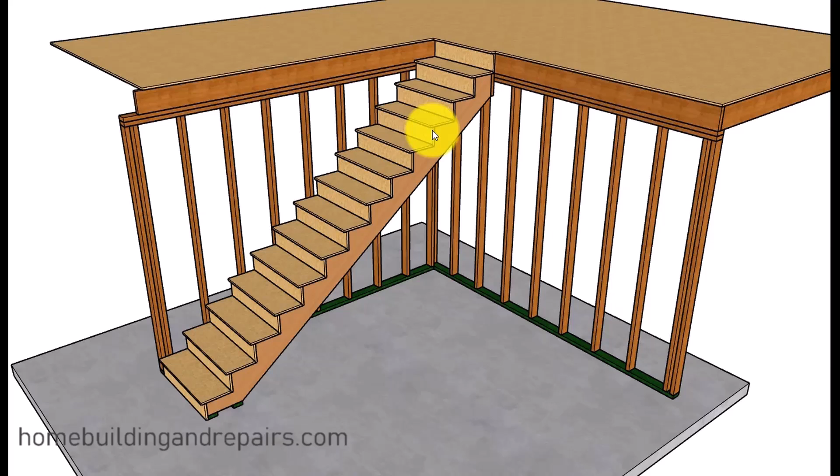In this video, I will show you how to create an arch shape underneath a set of straight stairs.

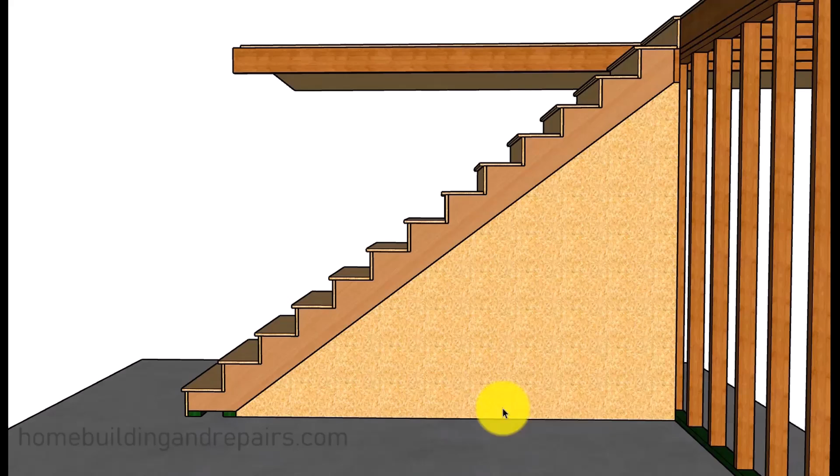First, I'm going to remove the wall so it's not in our way with our visual scenery. Now I'm just drawing this here. Obviously we don't have a large sheet of plywood like this, but I'm just drawing this to give you an idea of what we're going to be doing, to draw something on the floor. So this is just going to be a template.

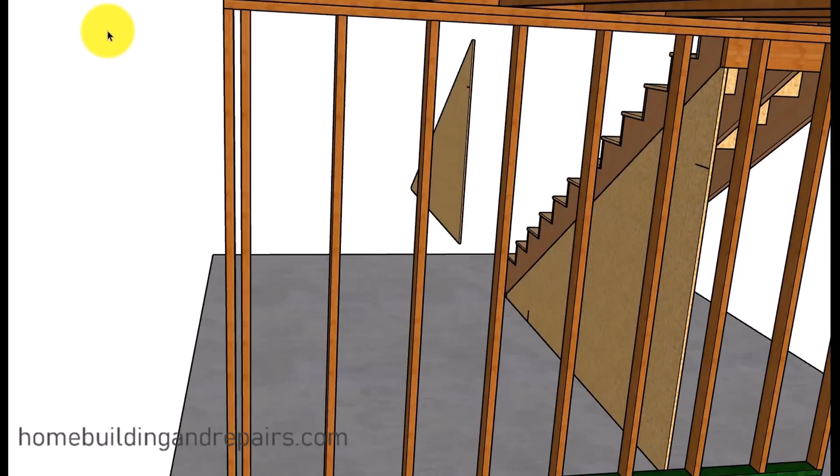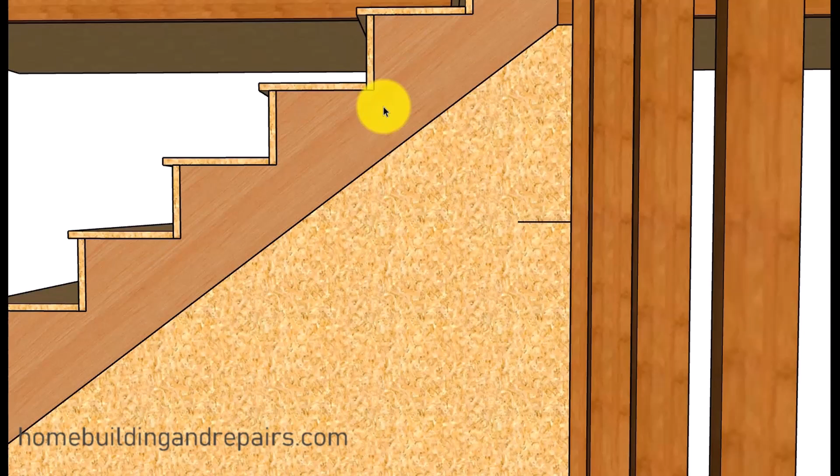Now let's put the lines we're going to use for our arch, and you can place these anywhere. I'm just going to start here and here and draw an arch in here, and then I'm actually going to lower it to give you an idea of what that would look like also. Coming in a little bit at the top, and you can see here you'll have to allow for this with your template if you have any imperfections, if it's not going to form a straight triangle.

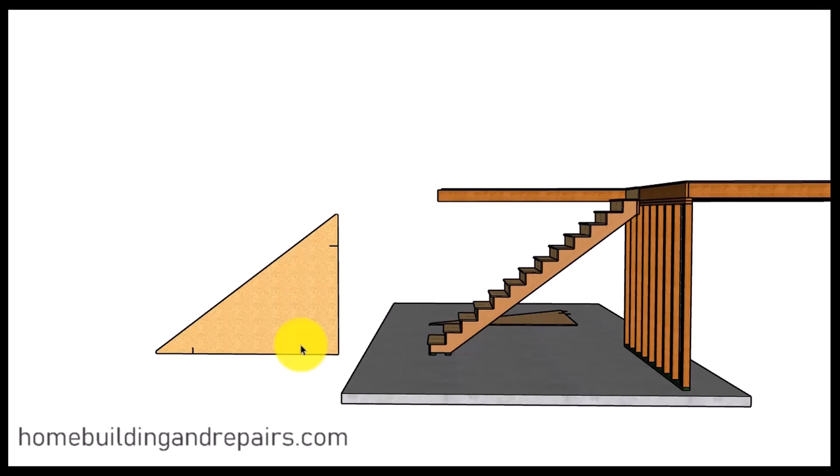Now let's move our template over here, and again I'm just walking you through what I think would be the easiest explanation of what I'm actually doing. I'm going to lay this piece down over here.

And of course here are some of our marks, like these are the measurements for the arc here. I kind of wanted to give you an idea here.

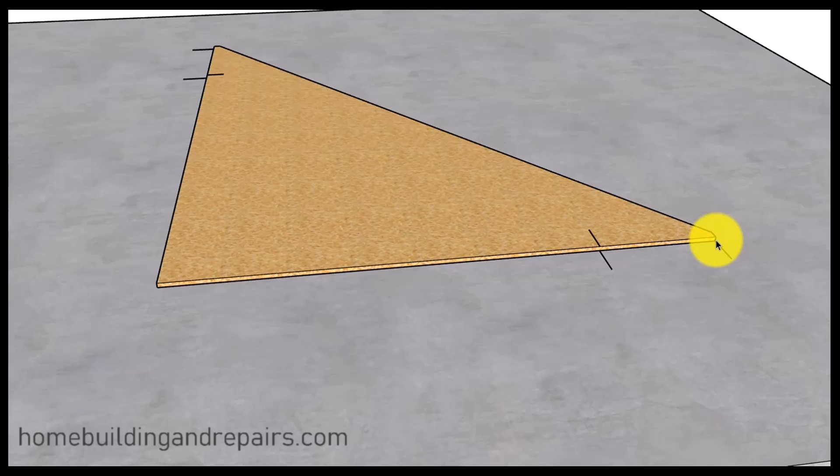Since I don't have a piece of plywood this big, I'm going to lay out some lines here that are square, and we're going to use some individual pieces of plywood to create our template. But again, I'm just walking you through what I think will be the easiest way here.

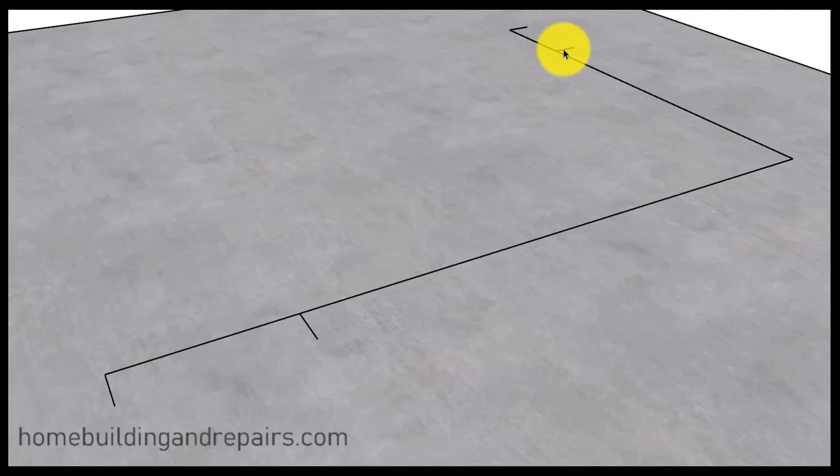So here are our lines, and then the end here, which remember we're going to go up 1.5 inches and 1.5 inches here. So we've got a couple of straight lines.

You can snap these lines out or draw these lines on a flat surface, or you can get a couple of pieces of plywood and screw them together to create a flat surface, whatever you need to create a surface. But this is just what I'm using in this tutorial as an example of how it can be done.

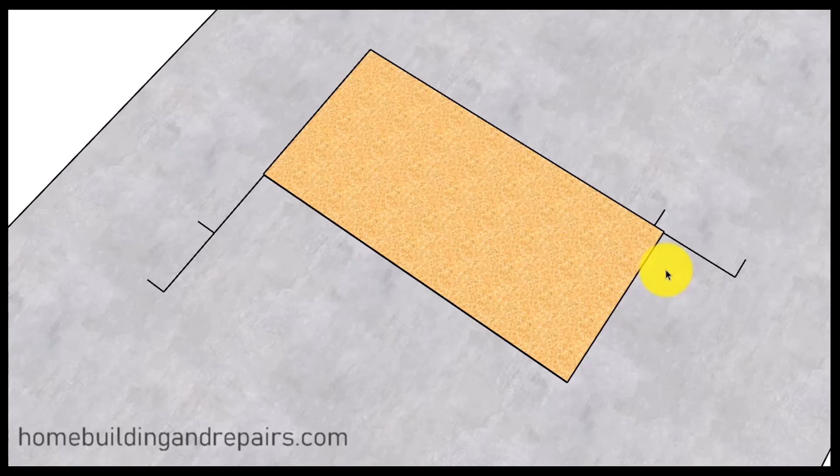Now we can go ahead and throw a piece of plywood in here. This is a 4-foot by 8-foot piece of plywood, and I wanted to show you how I'm lining it up with the lines here. Put the plywood in, give you an idea what we're doing.

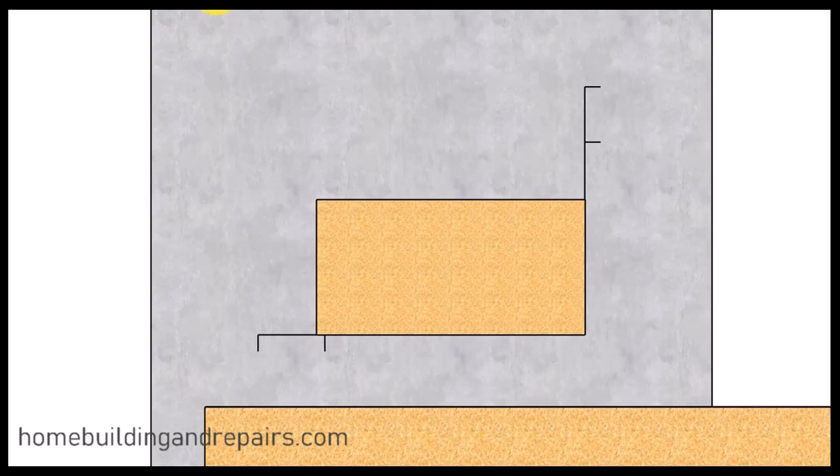And of course we need another piece down here and a piece down here for our template, so let's throw those in. Now we can draw our lines.

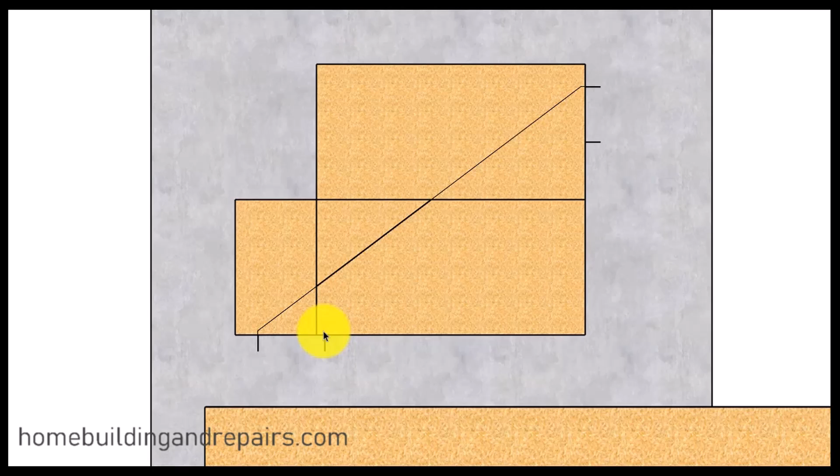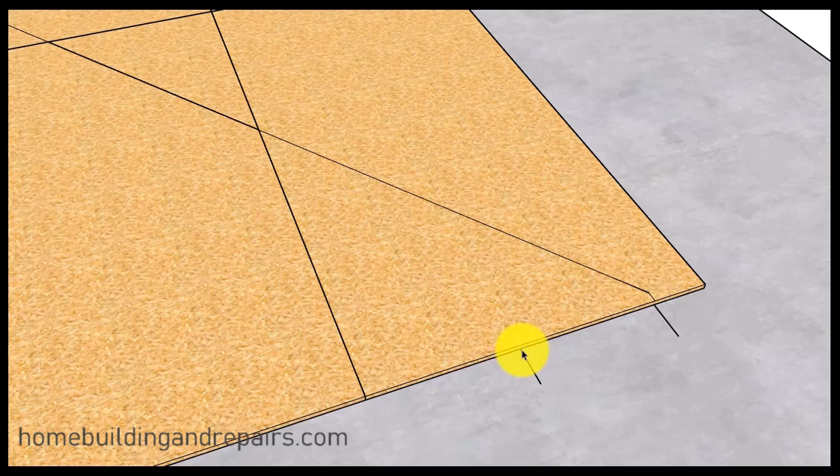Just want to zoom in, give you an idea. We're coming up 1.5 inches. Same thing over here, and remember these are the lines we're going to use for our arc.

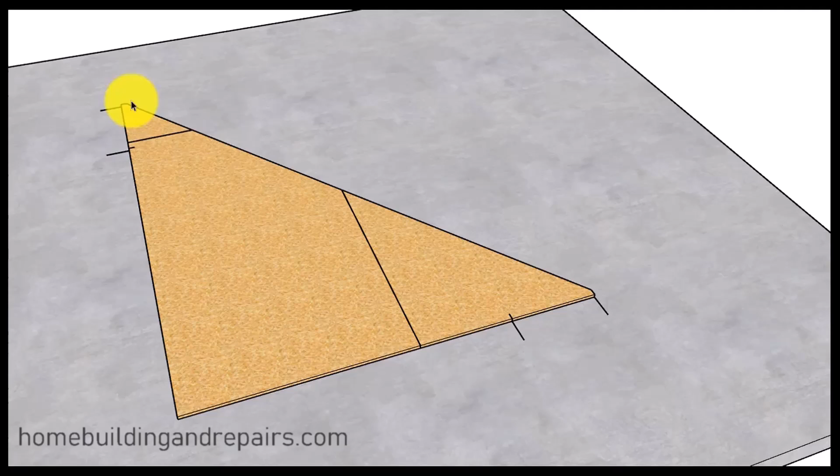Next up, let's go ahead and make a couple of marks here where our arc is going to go. I'm not going to go into detail and show you how to draw a curved arc or curved shape - I have plenty of videos on that already. I'll put a link here to the video, and maybe I'll put a link in the description box to the website where I have plenty of information on how to draw a curved line for something like this.

And if I don't have it on there for some reason and you can't find it, let me know in the comment box, or send me an email, and I will draw something and attach it to the video. I don't want to have 500 videos on the same thing as my main topic - I try not to even have too many more on the same topic.

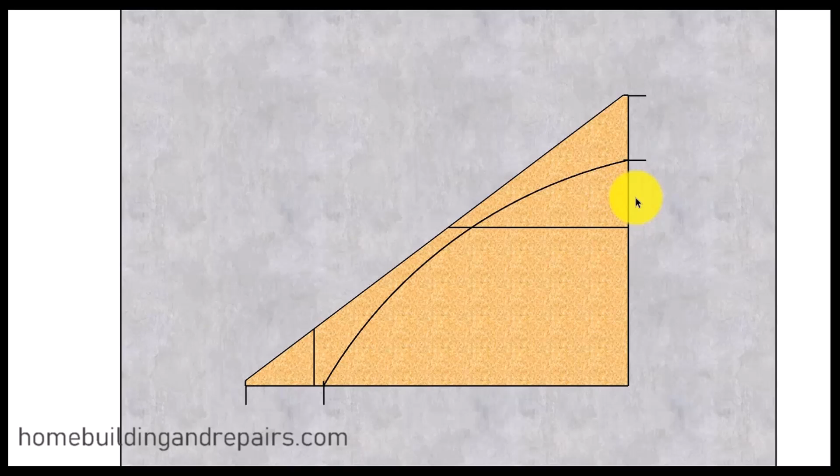So now let's go ahead and draw the arc. Again, we're starting from this point here, and we're ending here. We've got a nice shape.

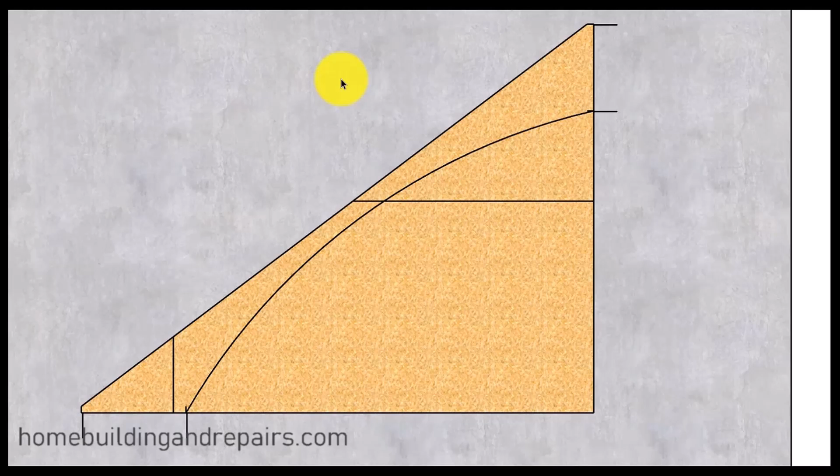I'm going to lower it here. We're not going to use this one for our stairway example. I'm actually going to lower this, and this is the one we're going to use for the rest of our tutorial. So this was the original line. I lowered it, and it's got a steeper curve.

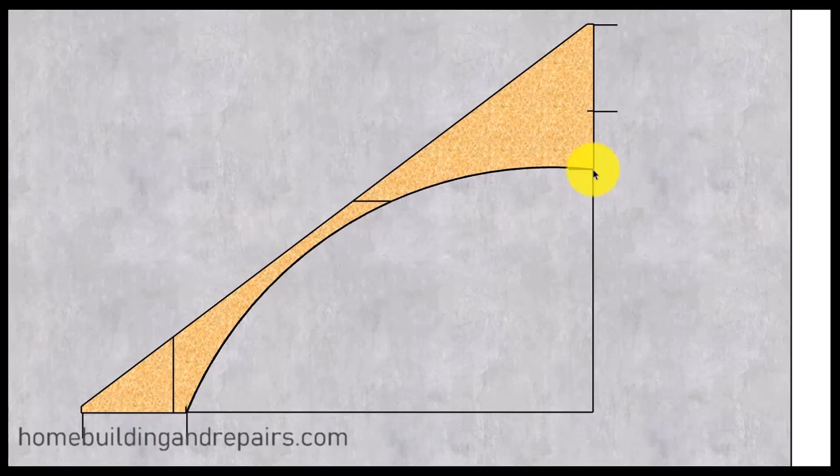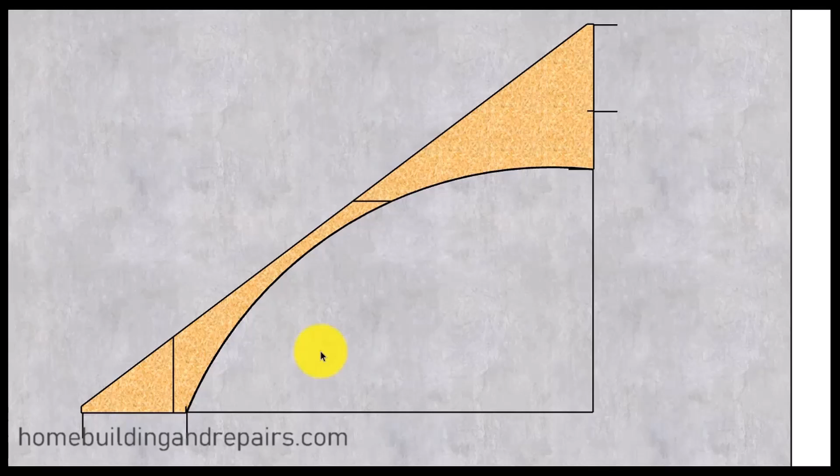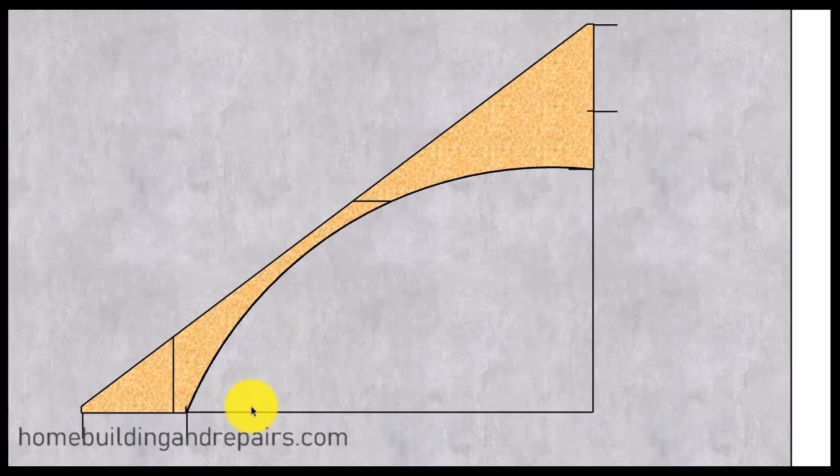You can move this in if you want a sharper curve, or something with a stronger curve. I don't even know what you'd call that - I know it'd be a larger radius. So larger radius, smaller radius. If we were to go from here to here, that would be a larger radius. If we were going to bring it in tighter, we would have a smaller radius on the circle.

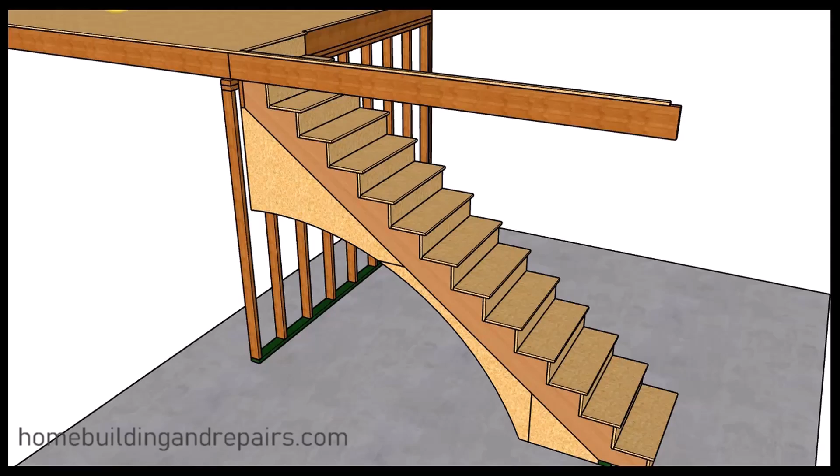Let's go ahead and put this piece right here, so we can start to see what I'm trying to do with this shape. It really creates a nice design, really looks like a neat stairway. I've never done anything like this out in the field, and I would imagine it would have something to do with people wanting a closet underneath their stairway for storage. Something like this looks nice, but it might not provide the homeowner with the most storage space, or maximize their storage space.

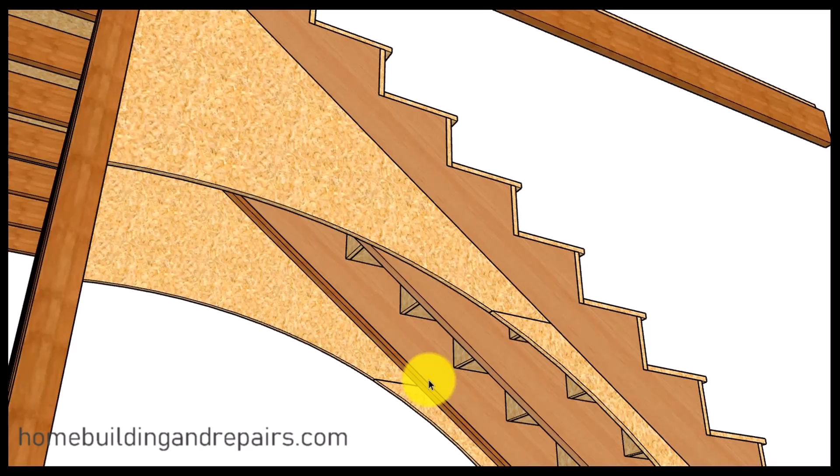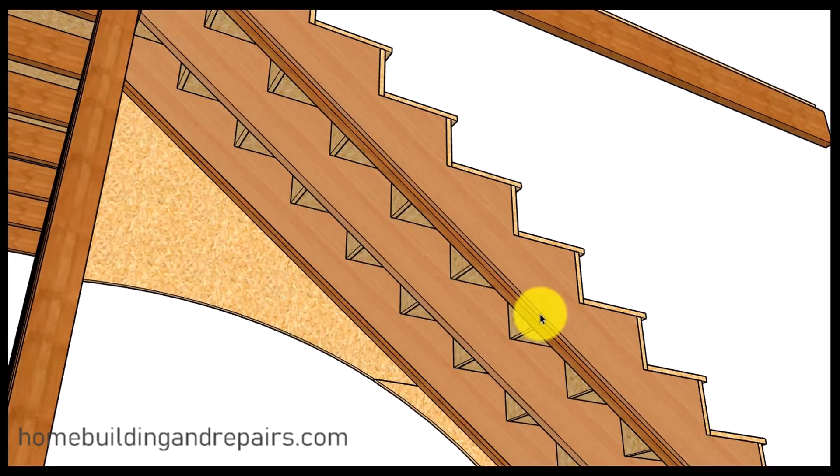Now I want to point out that I put a 1x2 here, and that is so we can attach the plywood template here to it. I'll give you an idea what I did. So we have 3/4 inch thick plywood. I moved it back 3/4 of an inch, and you can use screws or nails to attach it to the stringer like we got over here, so that the OSB or plywood or whatever you're using for your template material will flush up with the stair stringer like we have here. So you would just screw or nail this into the 1x2, and everything would be able to hang off of there.

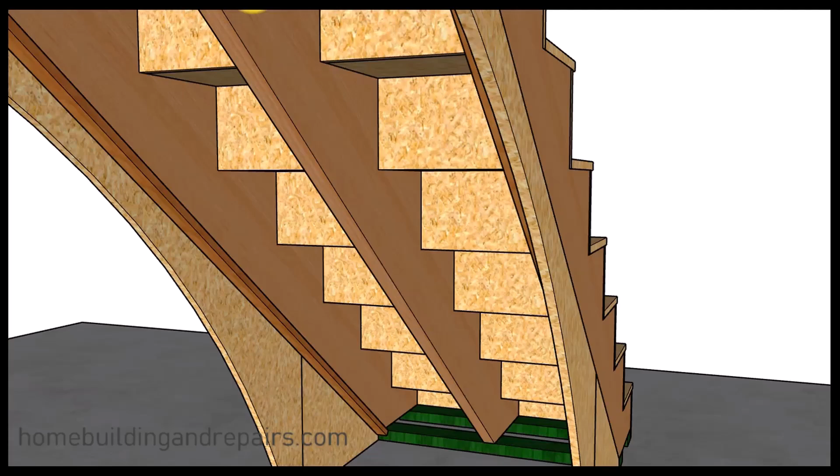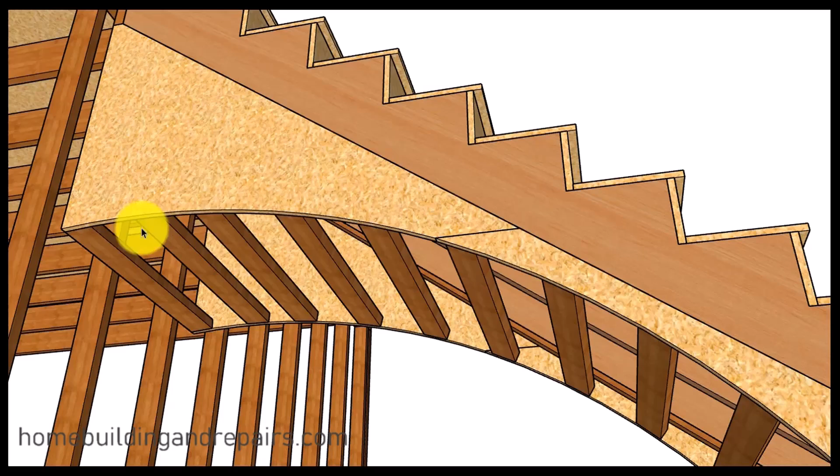Next up on the list will be to install some 2x4s. Let's throw them in there. These, of course, will nail or screw from the sides here. I think I spaced these about 10 inches on center, but you can see where we got a nice shape coming in there. And there you have framed the arch, or your template.

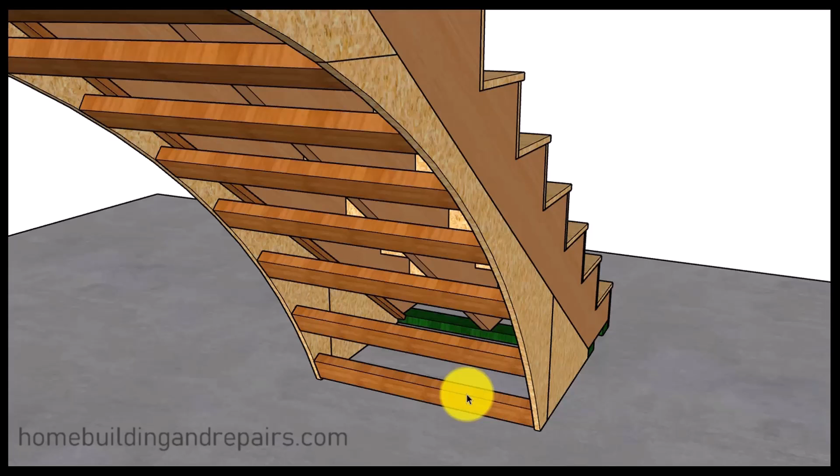Now, if this is going to move a little bit, you might need to put a brace. You might need to attach a brace from the stringer here, let's say, and have it come down to here, or attach this to the concrete with some treated lumber or something. And I think at the top, you could actually put some blocks in here and nail this board to the blocks to prevent this from moving. Just want to throw that out there.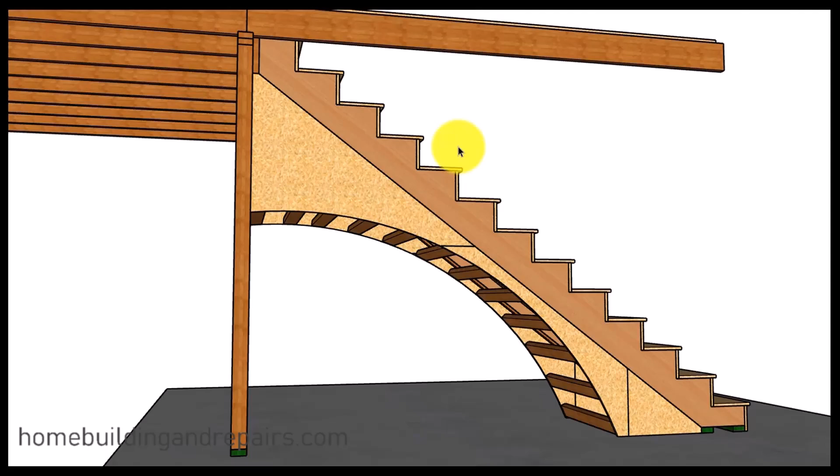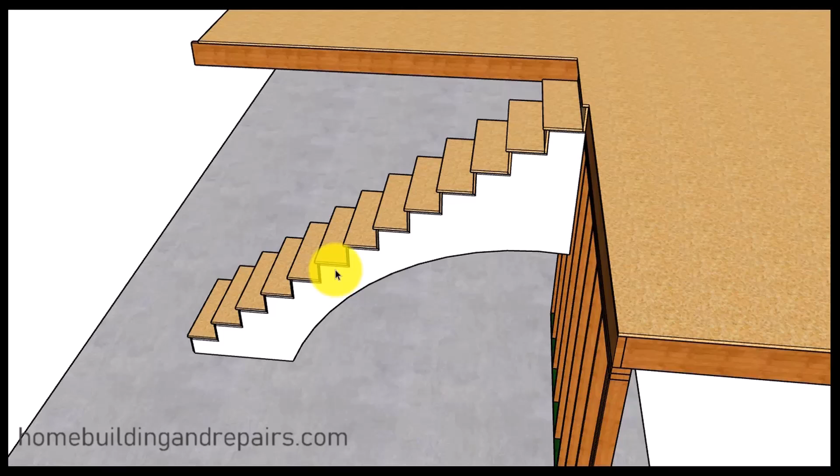Nice shape. Now let's go ahead and throw some drywall on there to give you an idea what you started out for, what you were doing with this project. I know a lot of people can't visualize what I did until I finish it off here. So there you can see, if you put some drywall on here, you'd have a nice looking shape to the bottom of the stairway.

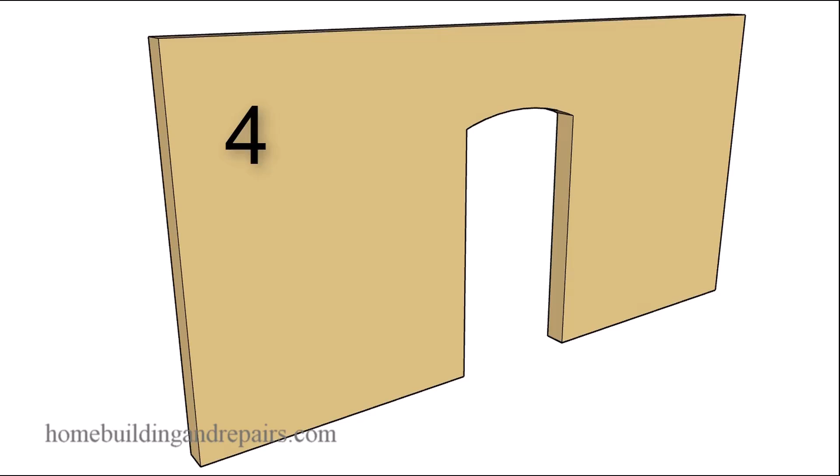In this section, I am going to provide you with 27 different arch designs. I'm not going to name them, but I did number them in case anyone needs to reference them in the future. Some of them are common designs you see regularly.

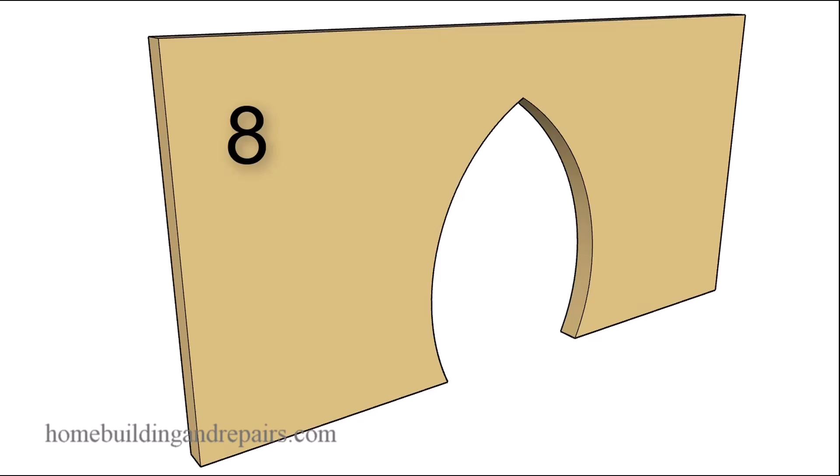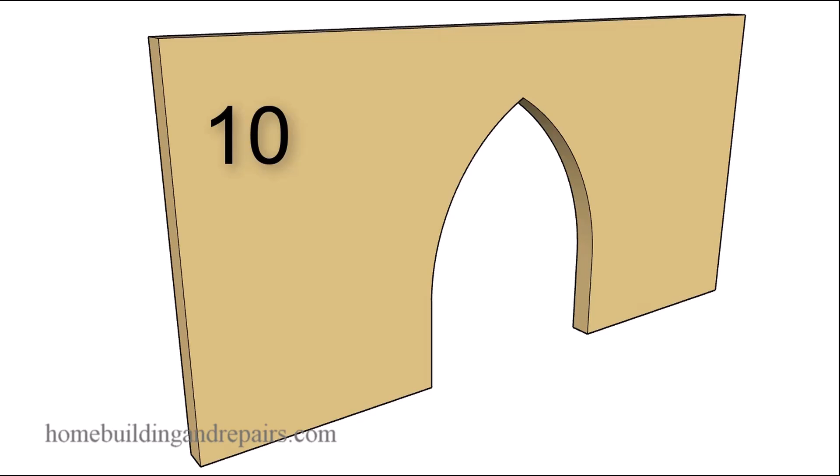Here's one you'll see - you might see it at a Mexican restaurant, kind of a shape like a bell. I just brought the sides in - take the sides out, bring them in. You can come up with a whole lot of different designs simply by making small modifications, and you can see them here. All I'm doing is taking and moving something over, or making a curve section of the arch smaller or larger.

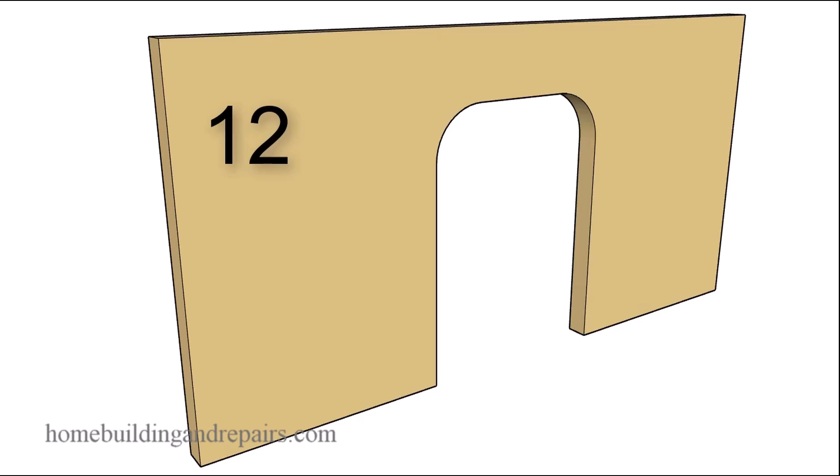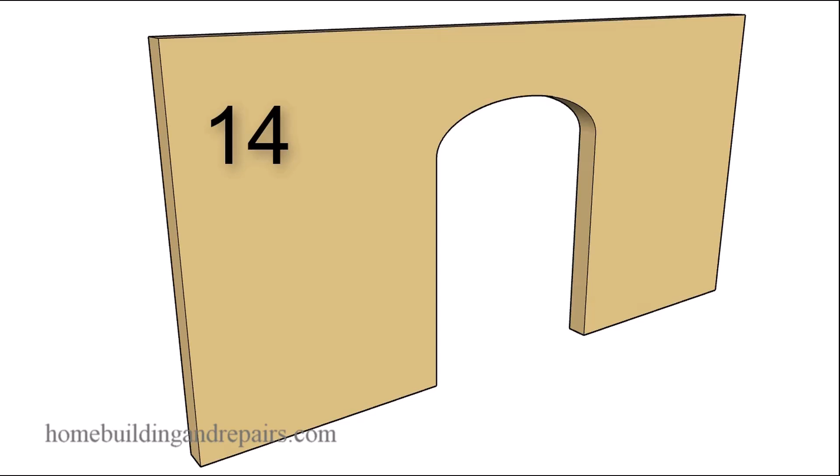Instead of using a circle, I might use an ellipse, or an oval - an ellipse and an oval to me are kind of the same thing. So this is basically an elliptical shape, and that's just turning it a little bit.

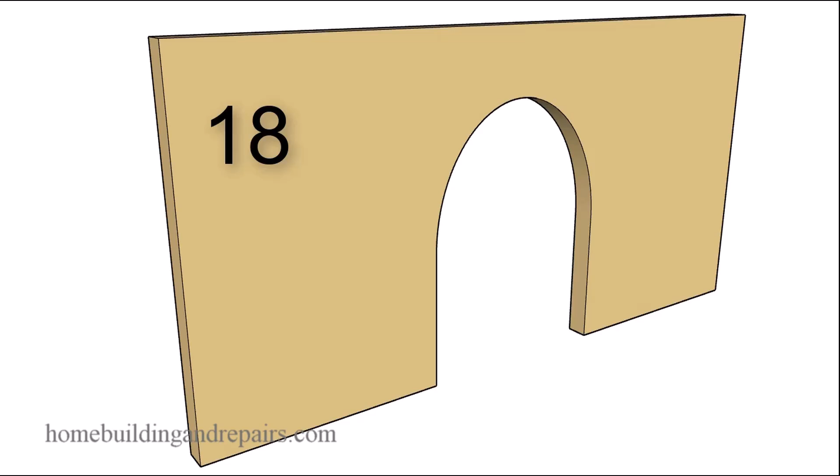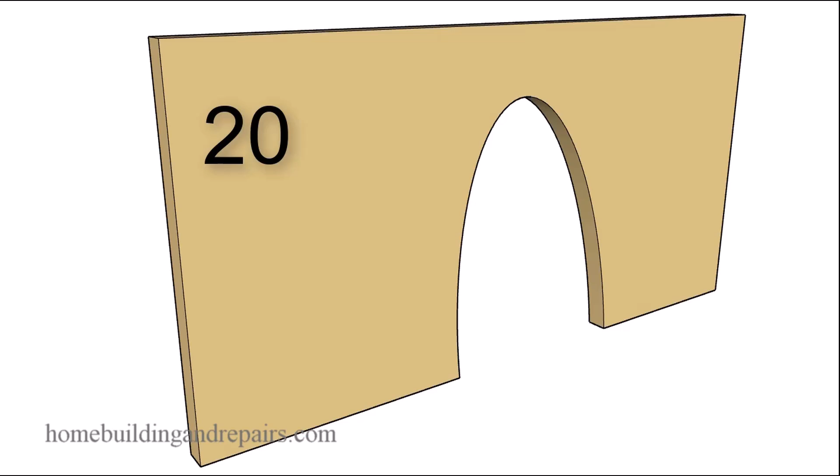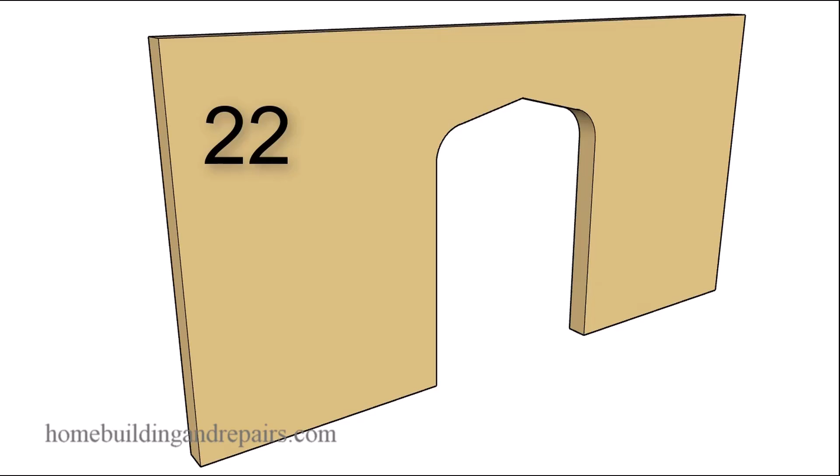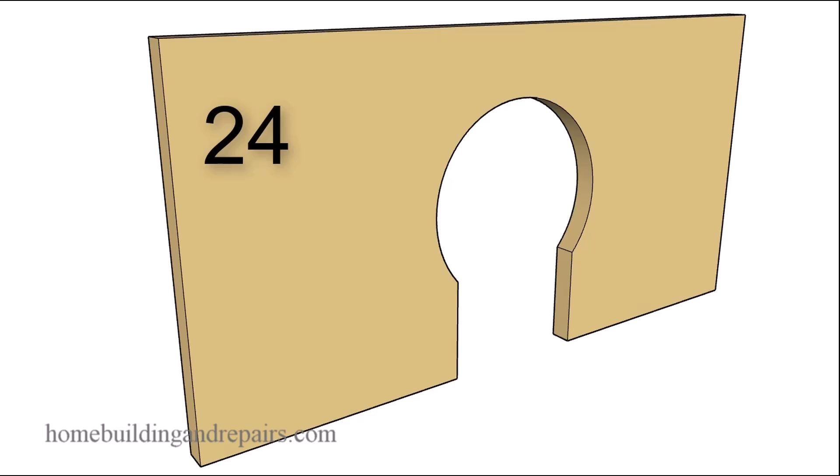I don't see a lot of these, but if you're an architect, or someone looking for some more design ideas - and I would imagine if you're an architect, you're not watching this video, but someone who's going to be building a room addition or something like that - you might want to have one of these funky designs, or use a combination of them to create something you like. Some of them might not be practical, I understand that, so use your best judgment. You don't want to create an arch style that might be difficult for some people to walk through, depending upon how wide it would be.

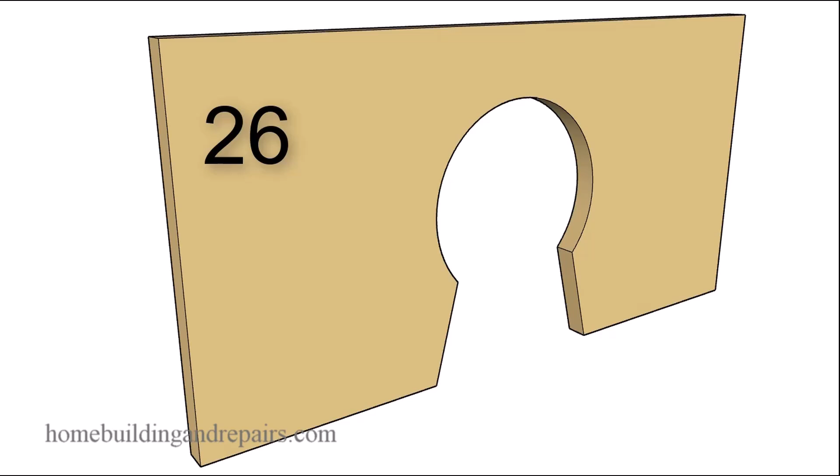So looks like we're coming to the end of the video. I will put a link here, or a link in the video description box, when I come up with a few more ideas.